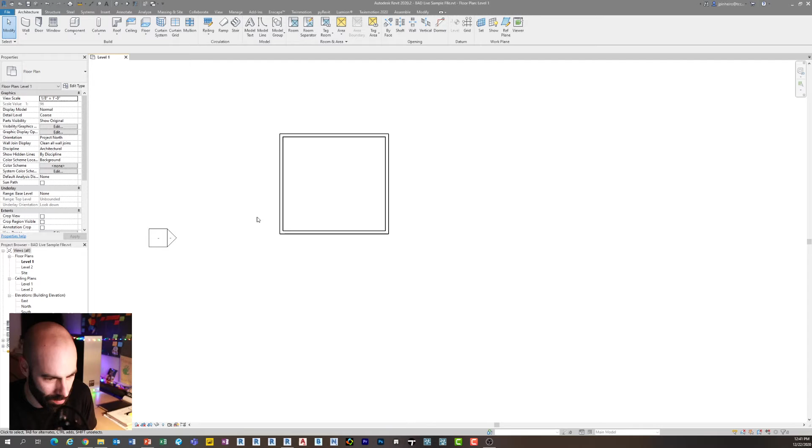Jose asked a question: best way to produce door, windows, and curtain wall sheets. Well, that could be an entire episode, Jose, because they're all kind of 3 different things we're talking about here. I'm not really sure which one I should pick apart. Everyone kind of has their own ways of doing doors, windows, and curtain walls as far as sheets are concerned. If you're talking about schedules, that's one thing. If you're talking about door elevations, that's another thing. I'm not really sure exactly what you're talking about, but that's a great idea, possibly for an entire episode.

I think what you'll find is that I might show a way here, but there's probably about 30 people online right now in this chat that will say they do it this way, this way, this way. So I think maybe we'll shelf that one. I'll use it as a topic for next year, and maybe we'll expand on it, sort of decide one or two of the best ways, best practices, and show those.

I'll tell you that it's not easy, and they're all different. So with doors, you could use legends, you could use detailed drafted views, depending on who. I like the idea of legends. You could use a future/standard phase, which Aaron Maller talks about in his 2 episodes that he came on this year, so that you're actually just using elevations of those objects, those doors and windows.

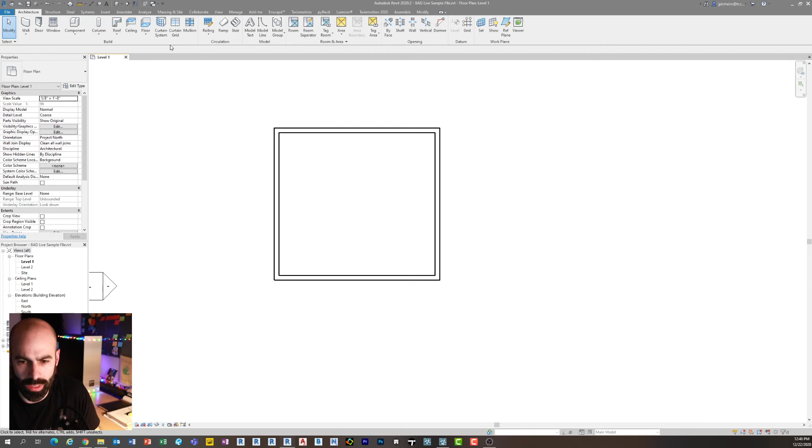Okay, close that. All right, so I think Lumion's finally open. Perfect, so let's flip over here. So if I quickly go in, I'm in Revit and I have these 4 walls, right? If I go in 3D, you can see there's 4 walls.

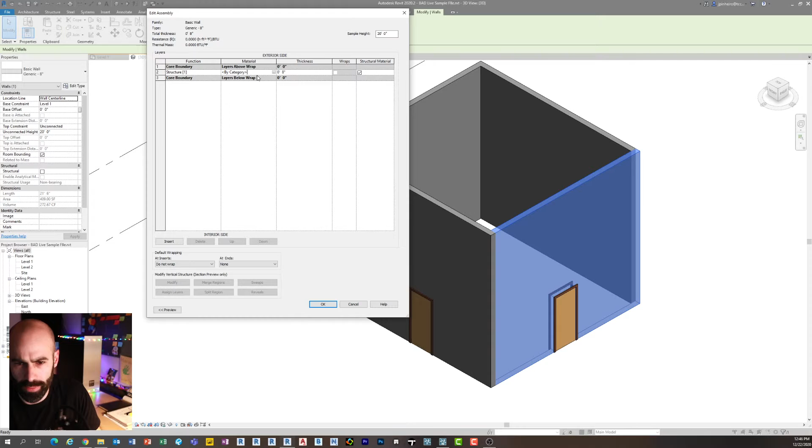Well, if I place a door in them, the door has a different color, etc. But if I go in this wall, if I click this wall here and go to Edit Type, this is a generic 8-inch wall, right? So all these generic walls in here, if I go to Edit, guess what? They don't have a material applied. So they get assigned a material when you export called default. So what you need to do is assign a material to this. So I'm going to quickly assign a material.

Let's just say concrete precast. Notice concrete precast over here, that's the name of my material. It has nothing to do with the appearance. It's all about the graphics here, or not the graphics—it's all about this material container, so to speak.

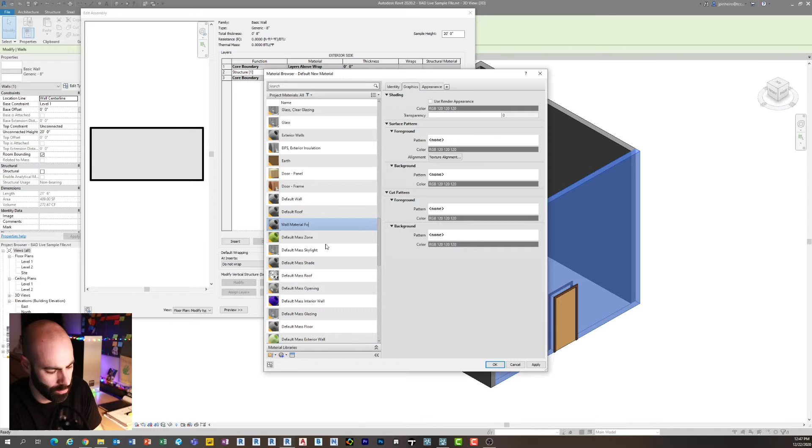If I want to make a new one, I can say create new, rename it wall material for Lumion 1, and assign that. Now when this comes into Lumion, I'll change these three to a different one—I'll change them to generic 6-inch. These walls are going to come in as default. This wall is going to come in as its actual material.

So what I'll do is I'll quickly export to Lumion. Of course, that goes on the other screen—I apologize. I'm going to put that on my desktop. I'm going to jump into Lumion and do a new plane.

You guys are awesome, by the way. So many chats coming in. I'm trying to keep up—I'm going to try my best to keep up, I should say.

So now I'm in Lumion here. Let me zoom out. I'm just going to go to import new model, select that guy, which is called BAO live sample, and click open. I'm just going to toss it in here. There it is. Beautiful. Oh, it's so lovely.

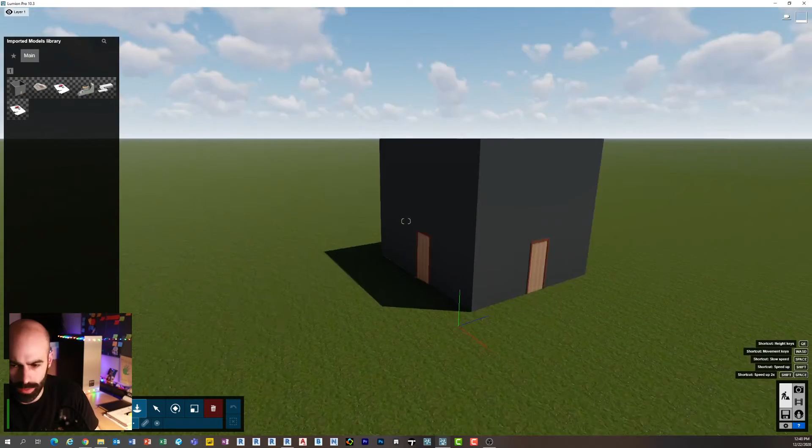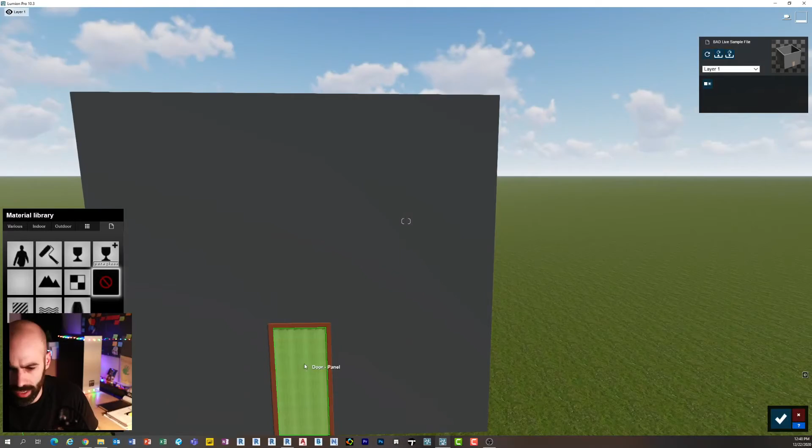Now if I go to materials, you'll notice this one—if I hover over this, it's called wall material for Lumion 1. If I click this, you'll see it selects all of these walls, and they're called default wall. And then if I go down here, I can actually select the panel, because that had its own material. So it has nothing to do with the elements.

If you're using Twinmotion, for example, you can actually export using element—the actual families, the actual family structure, categories, and all that. But the way Lumion by default brings it in is exactly what I just showed you. It's using the material name. So that's the issue you're running into there.

Let's see. Hopefully that was helpful. Anish, thanks for the question, buddy.

How to design a coffered ceiling—when I draw the section using sweep command, and I want to join them in Revit. Coffers are tough. I'm not really sure—it's one of those situations where it depends on what it is that you're trying to make, honestly.

I've seen some successful uses of coffered ceilings by building actual families that fill in the void. So you do a ceiling, and then you build a family that fills in the void, or you build it out using maybe walls on the inside, and then ceiling and ceiling. There's multiple ways to approach it. I think it depends on what your coffered is and what you're trying to do, or what the end goal is.

What you're talking about there is using sweep, so I'm assuming maybe you're sweeping it around the ceiling. That's probably the last thing I would do, mainly because you're doing an in-place component at that point. As much as possible, you want to try to avoid in-place.

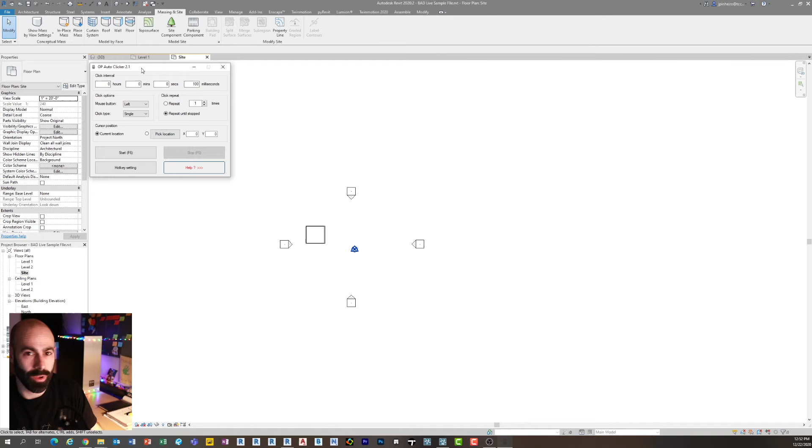The only way to smooth out topography - and I think Yolande is actually using it for exporting and using it in different software - unfortunately, they're going to get faceted. They're not going to get pretty smooth. The only way you're going to get something smooth is if you spend the time adding thousands and millions of points, that's really the honest truth.

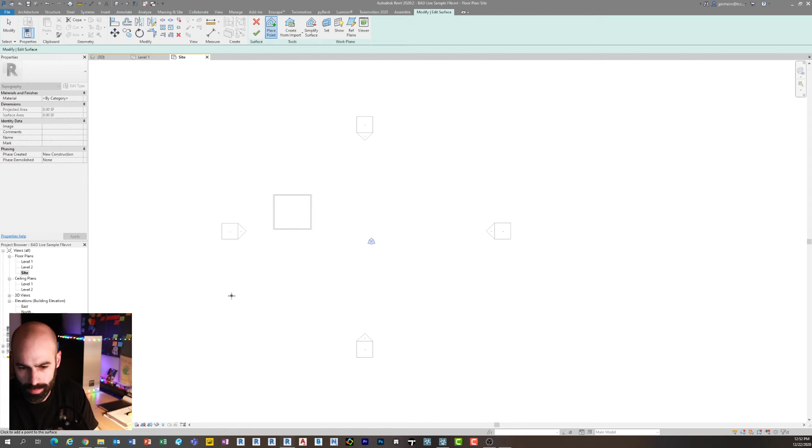So if I create a topo surface right now, you can see I have Auto Clicker up. I'm going to set this to 100 milliseconds and hit F6. So I just hit F6 and it's auto clicking. The tighter that these points are together, the smoother those lines are going to be, right? So you want these points to be really, really tight together.

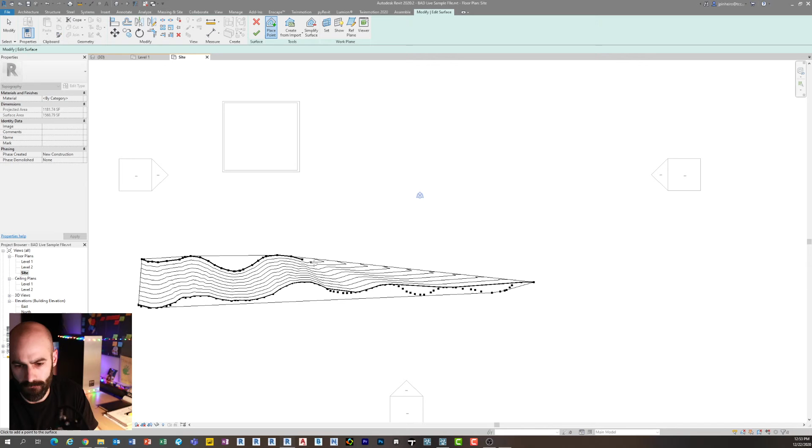The other thing is, if I say that's 0 feet, and I say go to 10 feet and I do this, Revit is figuring out what it wants to be in between all of these, right? That's what each 1 foot contour is. So notice how it's kind of jagged.

Revit's triangulating this. So if you really wanted something smooth, guess what? You are going to have to sit there and tell Revit what each foot, or maybe 2 feet depending on how smooth, wants to be. And that right there will get it, because you're basically not letting Revit decide.

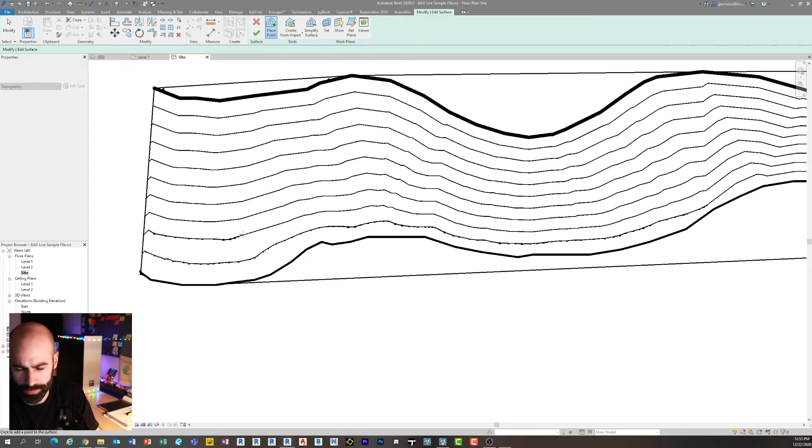So I'm just hitting F6 for my Auto Clicker, and I'm going to go like this. What I'm doing is placing points for every foot contour, essentially. You could try 2, you could try 3, doesn't really matter. But what you'll notice - oops, just went a little nuts there - is Revit now, it's kind of hard to see in here, but Revit's not trying to figure out what the triangulation is between them, okay?

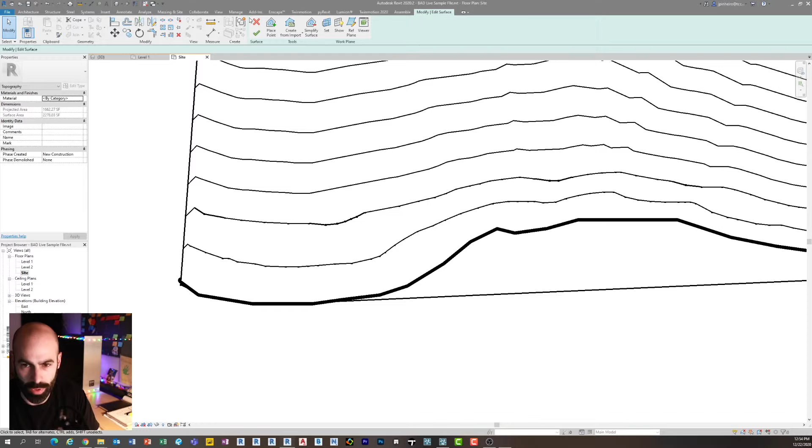So really, what I'm trying to show you there is the only way to get smooth contours is to model each contour as smooth as possible. So hopefully that's helpful, and we can dig into that more on the community, Yolande.

Wow, you guys are chatting up a storm. This is awesome. So many questions. Man, I forgot the first time I did this in episode 20, I did 2 that day, if you guys remember - one at this time and one at night. And I remember it was just nonstop questions the entire time for both episodes. So thank you guys so much. This is so cool. I'm gonna try and get as many as I can here.

Let's see. Is there any way to rename Workset 1 when enabling work sharing? I don't think you can, actually. Maybe someone out there knows, and I'm not even going to bother trying to do that live because I'd have to create worksets and do all that. But I do not think Workset 1 and Shared Levels and Grids, I don't think you can rename them.

Hey, Aaron's here. What's up, Aaron? I just gave Aaron a nice shout out before with his previous/future phases, depending on how you want to look at it. That is an awesome tip for those of you that don't know. Check out the episodes with Aaron Maller - I think it was the template one - but just go to live.bimafterdark.com and check it out.

Yash asked the best way for Dynamo. So I think what you're asking is the best way to learn Dynamo. First, check out all my videos here on the channel and at the blog at therevitkid.com.

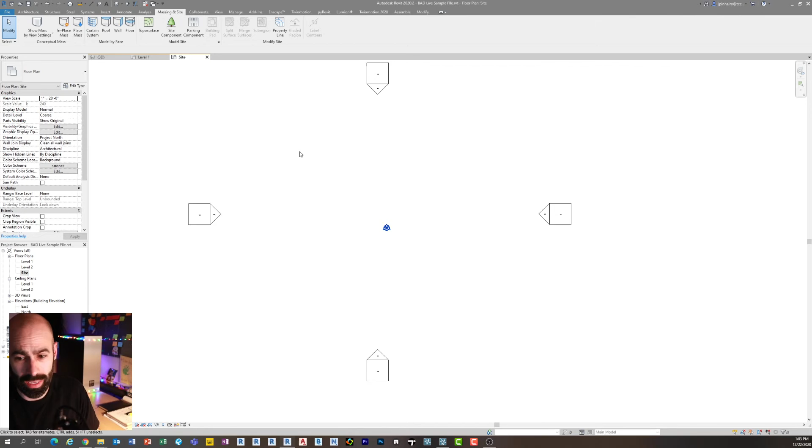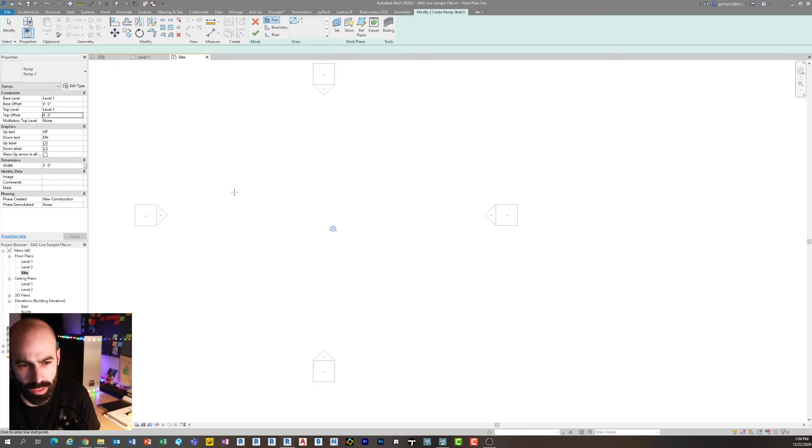All right, so I guess it depends on what your ramp is and the construction of it. So there's a couple things you can mess with. If I go into architecture, for those of you who have never made a ramp, I might as well do this here. Go to architecture, go to ramp, and you can see there's two ramp types in here. I don't know why there's two ramp types in here, but you can set your base level and your top level. So the ramp is going from level 1 to level 2, which is probably a really long ramp at 1 to 12. So I'm actually just going to make it go level 1 to level 1 plus 4 feet. We're just going to make a ramp that goes 4 feet, which is going to let me go 30 feet because that's per code before you have a landing. And then I'll do another 18 feet, which will get me 48 inches, right? 1 to 12, so here's my ramp.

If you wanted to change the default width, I could have. But now if I click finish and go into the 3D, there is that beautiful ramp. Wow, so much fun, so cool. So there's the ramp. So the question is...

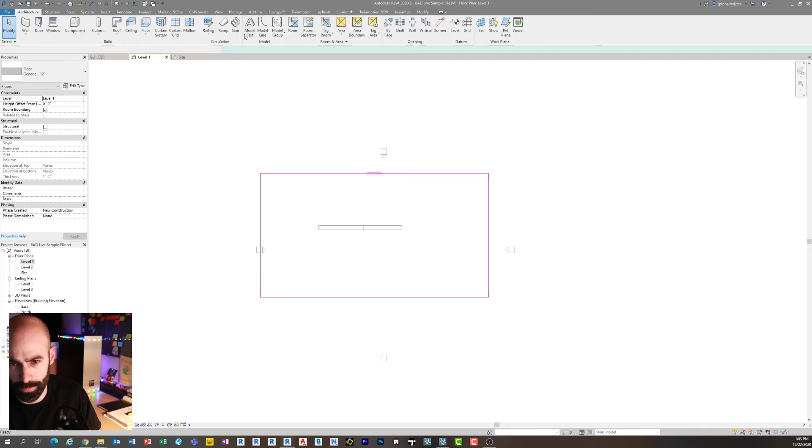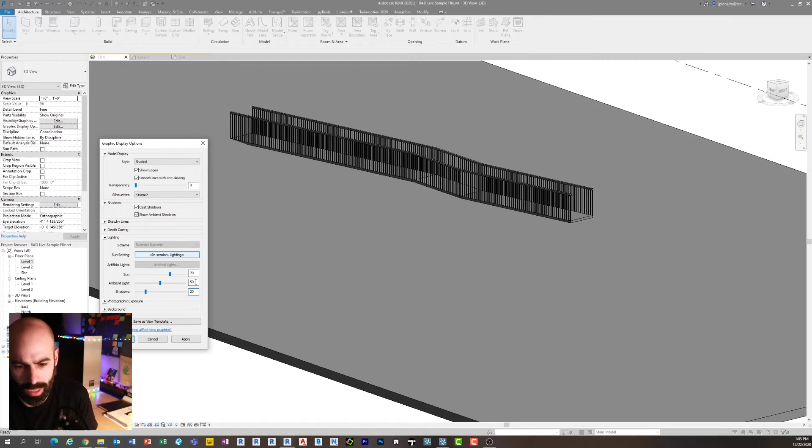Let me toss in a floor so that you guys have a little better context in here, because I know how that is. And I'm also going to add the 70-50-20 rule. Those of you not familiar with the 70-50-20 rule, check out a previous episode, I think it was making BIM sexier or something like that, but I don't remember the episode off the top of my head. Just head on over to live.bimafterdark.com, you'll see. But either way, the 70-50-20 rule is exactly what you're seeing here. You turn on smooth lines with anti-aliasing, turn on shadows and ambient shadows, and then you change the sun, ambient, and shadow light settings to 70, 50, 20. Click apply, and all of a sudden Revit looks absolutely beautiful.

Ta-da, okay. I'm also going to change these hideous railings to pipe railings for now. I guess it's not that much better. Okay, so the question is, how do you fill in under here?

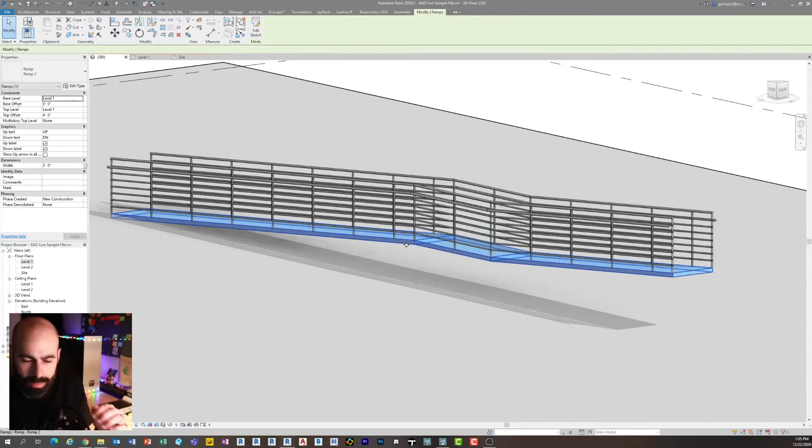It depends. If this is an exterior ramp and it's already built up, maybe you just want to do it directly. The truth is, odds are even if it's an exterior ramp, let me flip these so they're inside so you can see the wall edge. Actually, I'm going to delete the railing so you guys can just see the damn ramp. I'm going to click wall.

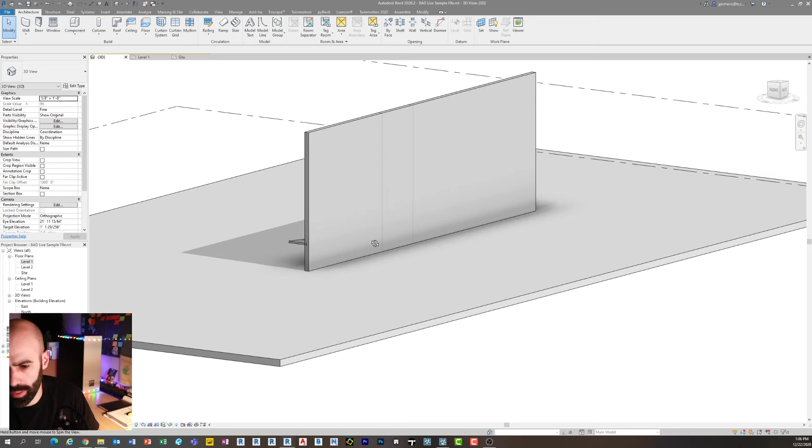Right now I'm just going to pick, for fun, the edge. I'm just drawing a wall like so. There's my wall. So odds are, in most situations, even in the exterior situation, I'm going to delete those. Actually, I'm going to host it to the exterior face. In an exterior situation, it's probably a ramp and a wall, with dirt and fill underneath it. I don't think it'd ever be built out like a Jersey block or a Mafia block wall.

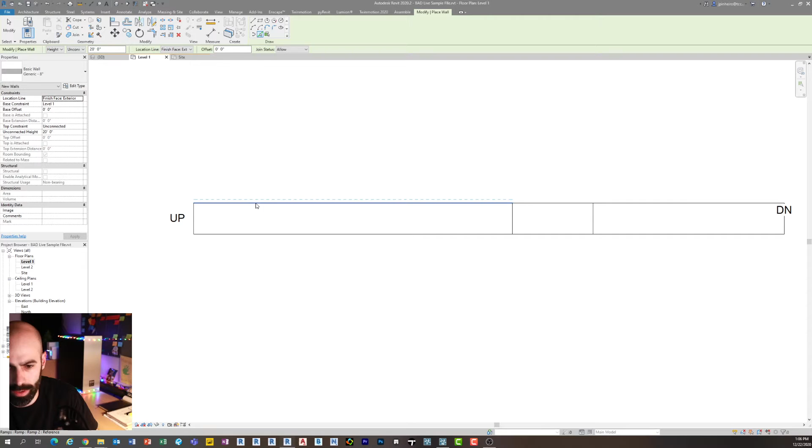So anyways, I'm going to do a pick line again. I'm just going to do finish face exterior and make the walls go in like this. Ta-da, there we go. I got some questions coming in there.

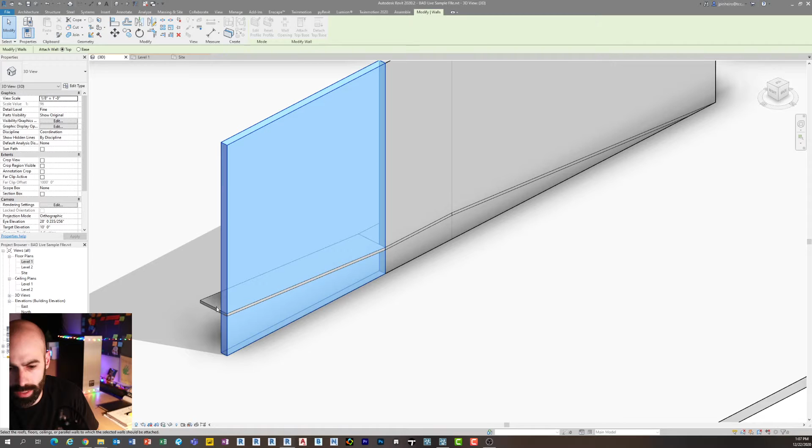So here's the kicker. If I click these guys and try to attach or join, for some reason Revit decided, or Autodesk or somebody making Revit at some point decided, not to let you join or host or attach a wall to a ramp. Why? I don't freaking know. I think it's insane and ridiculous, but it is what it is.

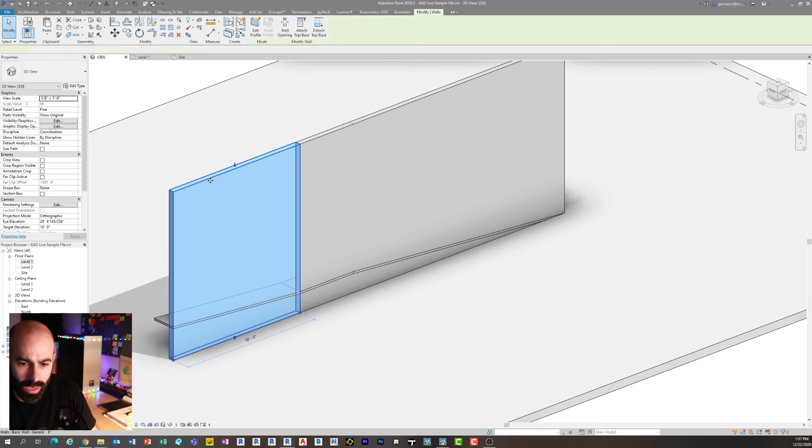So what you have to do is either modify the shape of the wall. If I go to Edit Profile, I can pick this profile, TR on my keyboard for trim, and delete the line up here. Duh. And then this one I can just pull down and do that. And then this one I can say Edit Profile, pick. All right, now you at least have it, and you'd have to do it on the other side or mirror it. So let me do this.

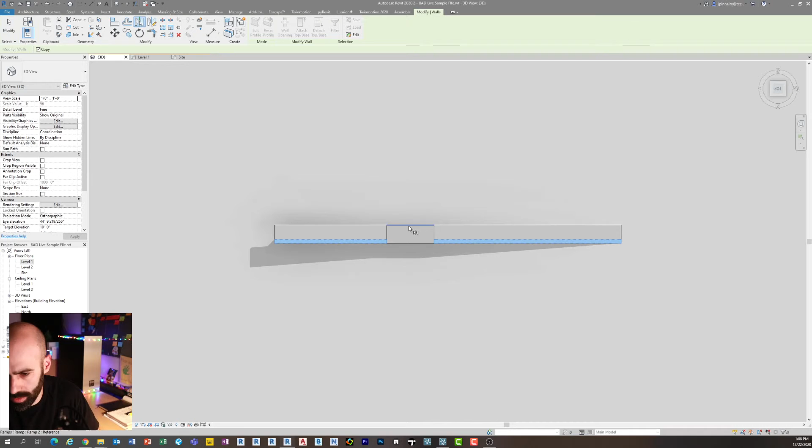If you want to, you can pick and lock them, though I'm not a huge fan of that, since locking things can be disastrous. So now I'm just going to type DM on my keyboard. I'll go to level 1 first, select them, type DM or MM and mirror it. Then go to 3D, and there you go. You have it filled in, right? So there's one way.

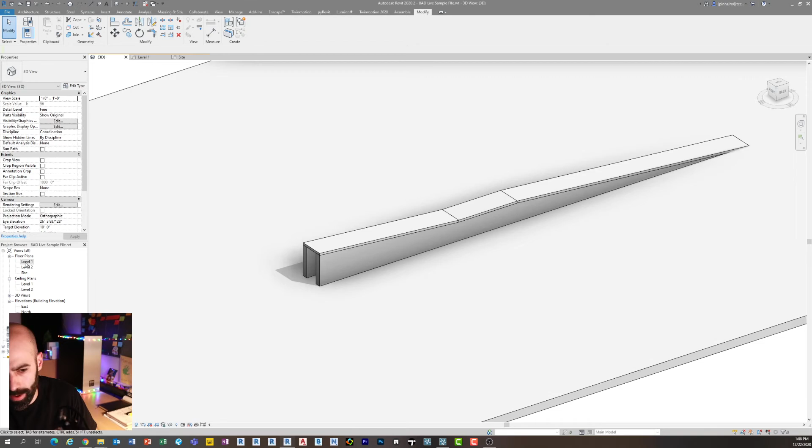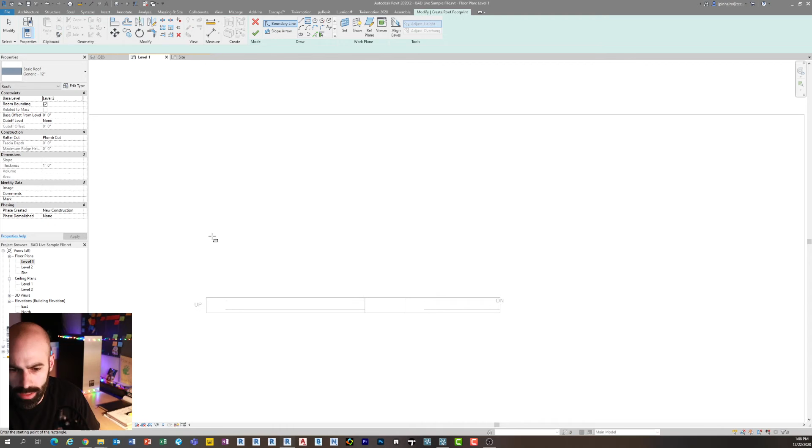If you want, you can put reference planes and attach to the reference planes. The other way is, if you really want, you can use something the wall's attached to, like a roof, I guess. I don't think wall's attached to a floor right now. You can use a roof, but I don't know if railings attach to roofs, since I haven't done it in a while. Let's find out, let's have some fun with this.

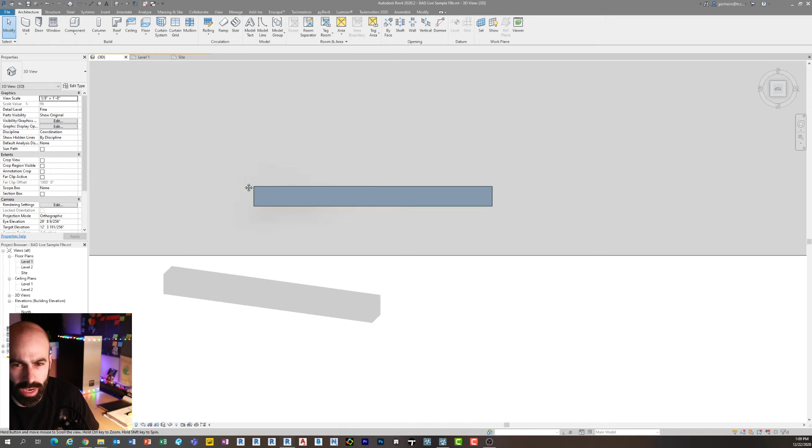I don't recall. Now with the roof tool, you have this cool little funky area here. If I want, I can draw a railing and see if it attaches. I don't remember anymore. There's been so many hosting changes these days. So the railing attaches to it, which is great, and then the wall attaches to it, which is great.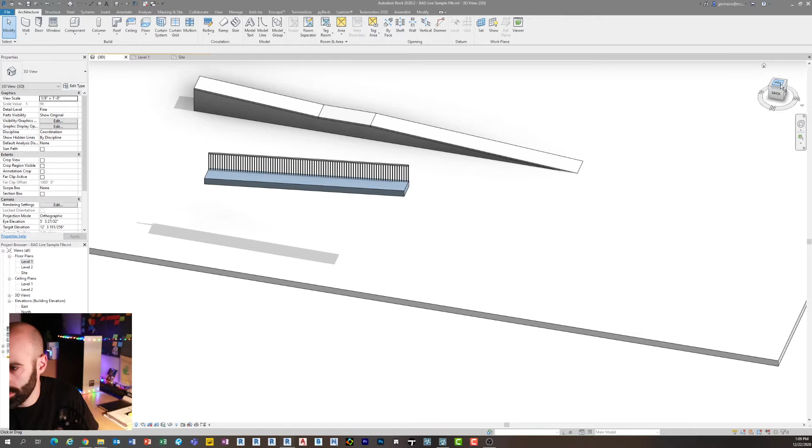So the nice thing about this is you could use a roof, call it a railing, do whatever you want with it. And I'll give Aaron credit again for this, because he's the master at using categories for wrong things, because they're just so much better.

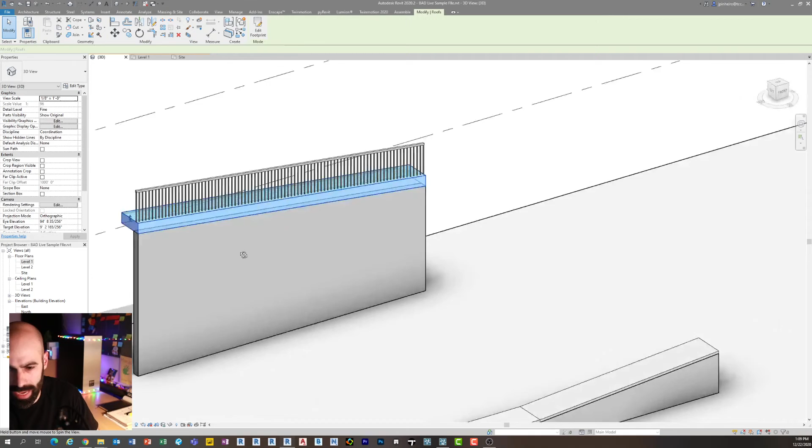And now I can say attach, and attach it to this guy, and look at that. Now not only is it attached, but whatever this roof does, to some extent, not if I drag it like an idiot here - and I'm disjoining it so everything's freaking out, so let's just do this - if I change the slope of it, look at this.

Of course, there's downfalls, there's negatives. You won't have the up arrow and all that good stuff, but you get what I'm saying. So there's different options, but what's right for you may not be right for everyone else. Hopefully that's helpful to give you another option when exploring that.

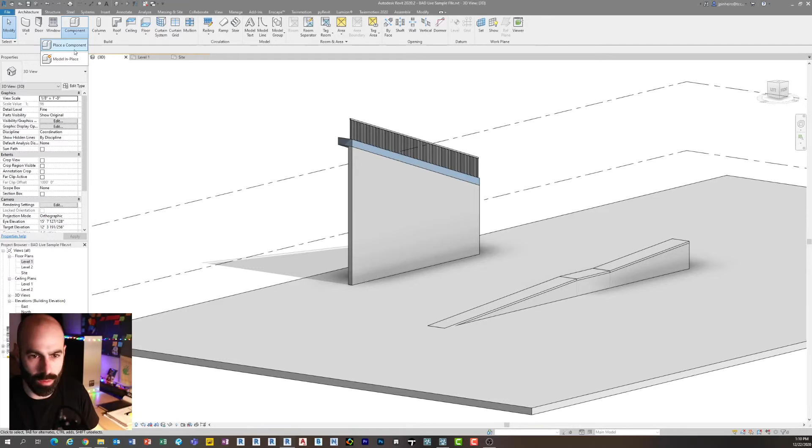But I would, in general guys, and this goes back to the coffered ceiling question, everything - think twice before you do this. Think twice before you click component, model in place. This should be, in my opinion, one of your very last options. Think about all the other ways to do something before you model in place. It's good practice, and it'll make you a better Revit user as well as a better model creator.

So who's Jeffrey Anton Pinheiro? I have no idea, Robin.

Bezad asked, will you explain when multiple users work on a project at the same time, how can we have a backup from the central file? When you're working in a work-shared file, there is a backup that's created, there's a backup folder. I'd suggest checking the Autodesk help, there's a bunch of information on how to recover a backup file through the central file process. Not to mention, you usually have local versions too. Look for where your local versions of those files are copied, because sometimes if you can't restore the central, everyone should have a local version somewhere, and you can use those to restore it. So a little tip there.

What size monitor do you recommend? Hey Karen, we just had a conversation about monitors on the community as well. My absolute favorite monitor is a 27-inch 2K monitor. So the resolution is 2K, which is 1440 by 2560 or whatever it is, and the size is 27 inch. That's what I've got right here working with me, that's what I've got in the office. That's by far the perfect balance between not being too big but not being too small, and the 2K resolution is phenomenal. I'm using a ViewSonic right now which I absolutely love, I've got 4 of them in different locations, these are 27-inch 2K monitors. Huge fan of those. Personally I love having more resolution, but with 4K you end up scaling up just to read things usually, and to me I'd rather have it full scale. Perfect 2K gives you a little bit extra. We're good to go.

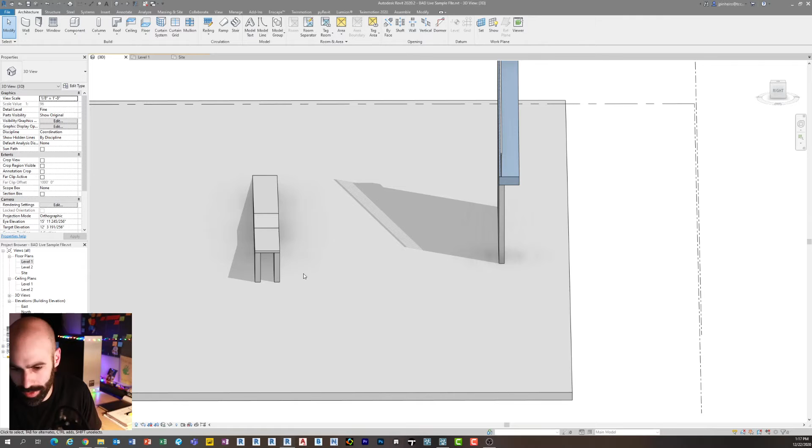John just made another suggestion, which is kind of cool, and maybe I'll show it real quick because I do think that's a cool suggestion. This is what I love about Revit, there's like 1,000 ways to do things. John was suggesting, if you want to use a wall, maybe use this wall or these walls, so I'll delete these ones. You can also make the wall the width of the ramp.

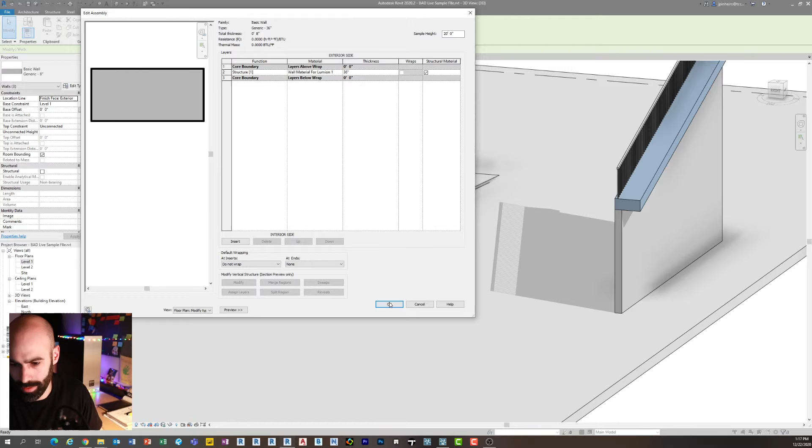So this wall right here is generic 8-inch. If I go to edit, duplicate, I'll say generic 36-inch. So I just duplicated it. I'll change the thickness of it to 36 inches, or 3 feet, or 1 meter I guess. Now you've got yourself a nice thick wall that goes along with it. And if you use the same method over here, then it would also follow, of course this would have to be the thickness of it.

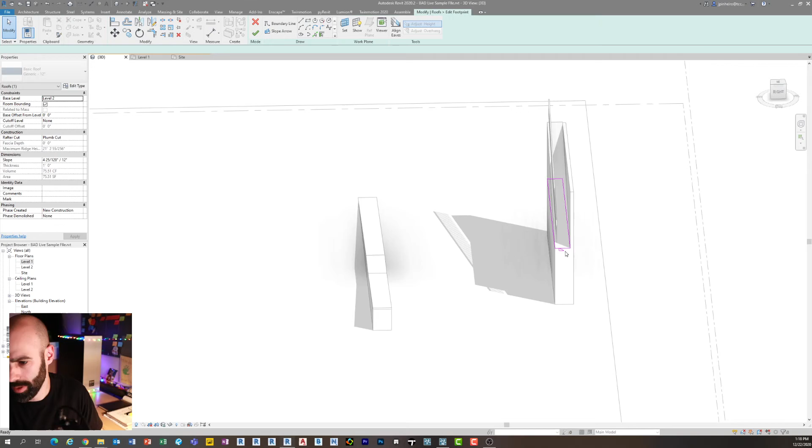But again, I don't know many construction details where that's how a ramp is built. I believe the wall section through this will probably have two walls in my experience, but that's pretty cool. So now you've got this solid mass that's going underneath it. Of course, you have to manage the thickness of the wall versus the ramp if it changes, but you guys get the idea, which is pretty awesome.

Merry Christmas, Tom. What's up? Tom, better late than never. That's all right, man. Let's see.

Can we detail a section and make it separate from the project because sometimes it makes problems? I don't know fully what you're saying there, Taha. Taha asked, can we detail a section and make it separate from the project? I think what you're trying to say is, can we draft a section so it's separate from the model, I think. Correct me if I'm wrong. And I would say no.

I would say as much as possible, use as much of the model as you can, even for your wall sections and details. In my opinion, a typical detail means it's something that can be applied to any project accurately. So if you're cutting a section through your building because that floor to floor height is very specific, guess what, that is a project specific thing. That is not typical. And the reason I'm getting a little fired up about this is I've been on many projects where that was the case.

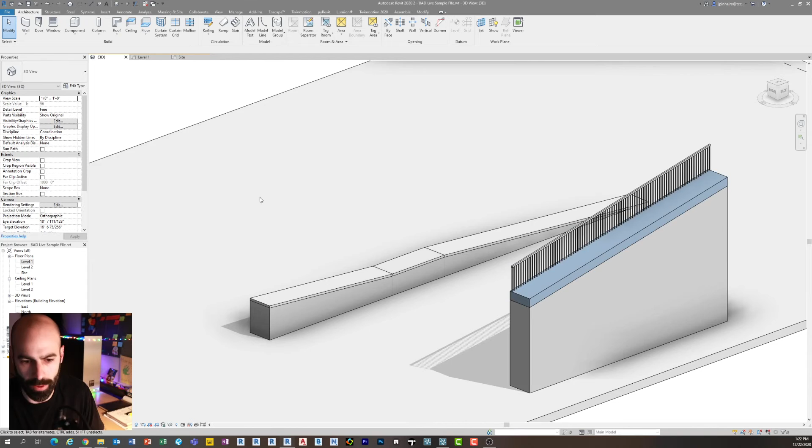JF, I think we got some clarifications on questions here, on the projection lines, something like overhang, curtain pockets, ceilings. So I think what you're saying is managing something like projection lines. I do have a little tip you can find way in the archive somewhere on the blog. When it comes to projection lines, like maybe an overhanging roof, there are a couple tips that are helpful. My suggestion, just like before, is try to use the model lines as much as possible if they exist.

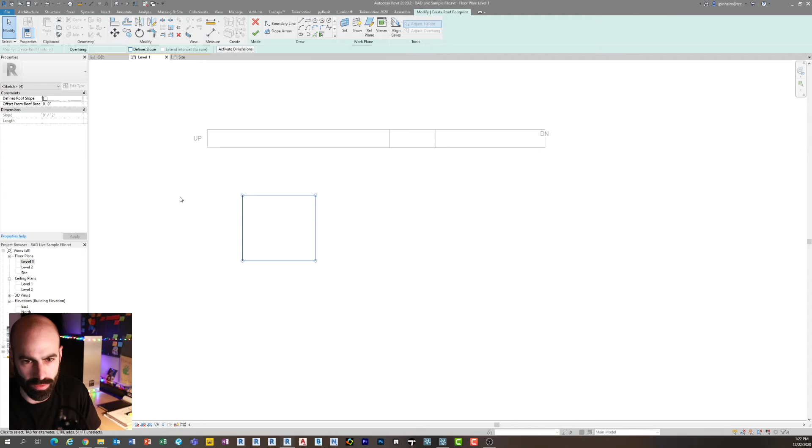So let's do a roof overhang real quick. If I have a roof, and this is just a flat roof for the sake of argument, the roof is at level 2, right? It doesn't show on the first floor. Here it is there, right? There's a whole bunch of stuff on here, so let me try and make it so it's not too confusing for you guys.

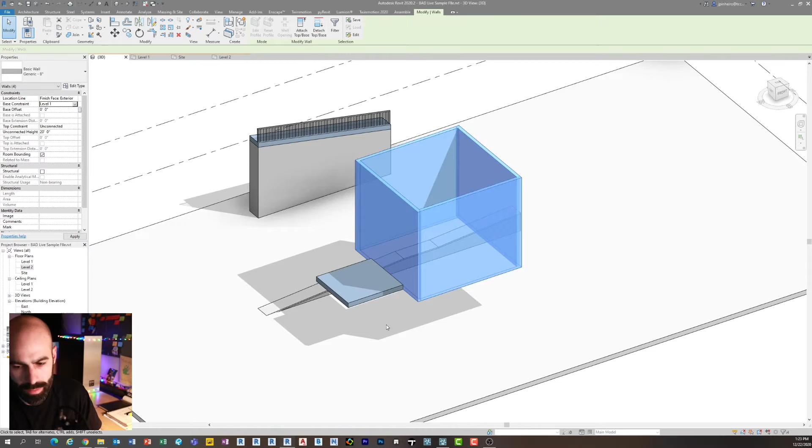I'm gonna quickly draw, and I call this one the overhead line trick. Anyone who's taken any of my courses knows this one a little bit. This is just one of those quirky things with Revit. Let's say this is my beautiful duck-looking building. Look at that bill, quack quack.

If you have this overhang and you want to show it on the first floor, right? So if I go here, I want to see the overhang here as a dotted line showing overhead, right? That's just a typical architectural graphics thing. So there's a couple things that people will do.

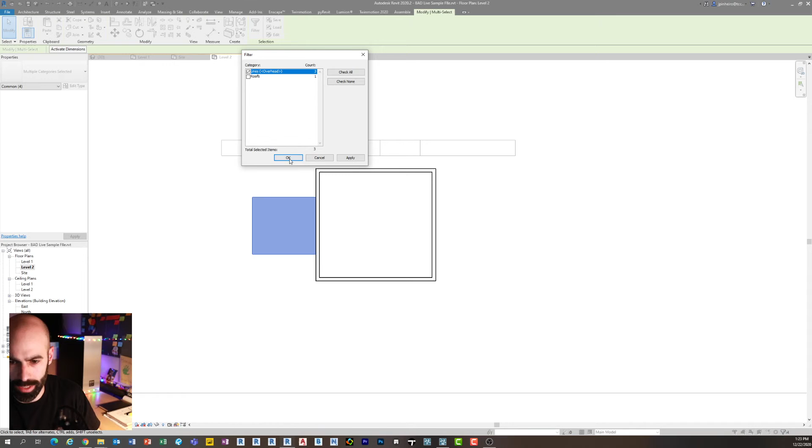The first thing they'll do is they'll go to level 2, go to annotate, detail lines, click overhead. They'll do maybe a pick line, take this guy, filter it out, or use PyRevit to use the selection thing. They'll copy it, go to level 1, and then modify, paste, align to current view. Ta-da, we got it, right?

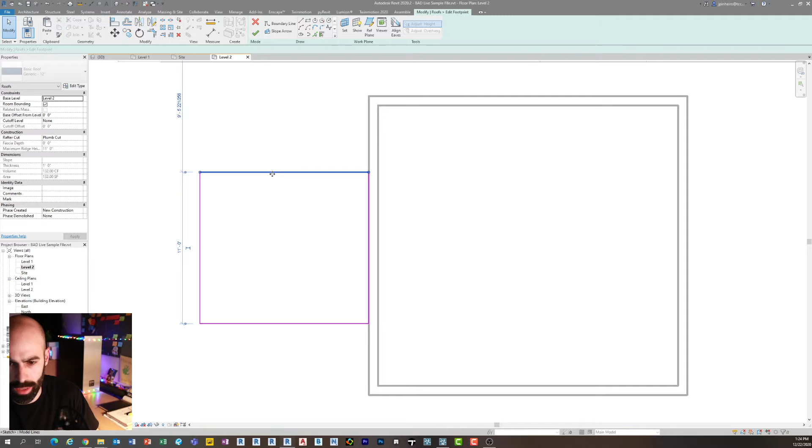Problem is, this is just a line now, right? This thing is not attached to anything. So if I go up to level 2 and I move this roof, guess what? I have to delete that. I have to go here and move or delete and redraw this, right? This has to move up with it.

So by all means, what you want to do is utilize the model whenever possible. There's this really cool trick: if you change your underlay, so if you put level 2 as your underlay and click apply - so I'm in level 1 and I'm underlaying level 2 - there's this neat little thing with Revit where these underlays are objects.

Oops, I'm looking up, look down. Let's see, look up.

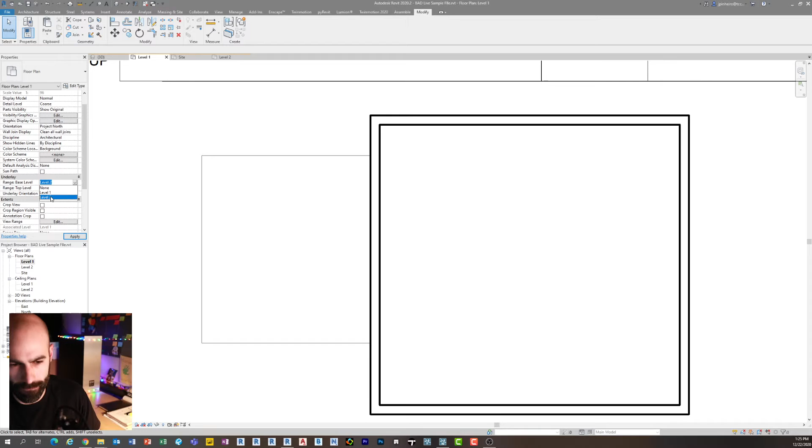Oh, maybe not. Did they make me a liar? Okay, maybe it changed in 2020.

Look down, so what you could do then, let's do it this way. This was going to be my second option - you can look up, right? So now you're looking up at things, and you can make the line weight show as a dotted line, for example. So either you do it in the object styles, or if I go under visibility graphics, lines, there's one called beyond. For those that don't know, that's when you're beyond your view range - we don't need to get into view ranges today. But here, you can change this to hidden.

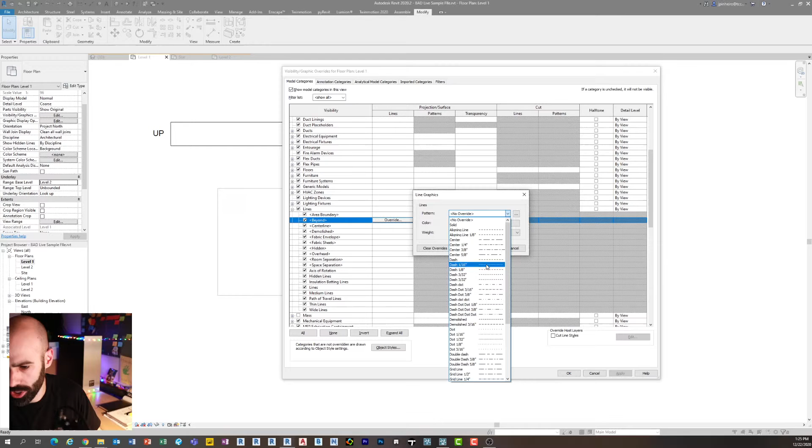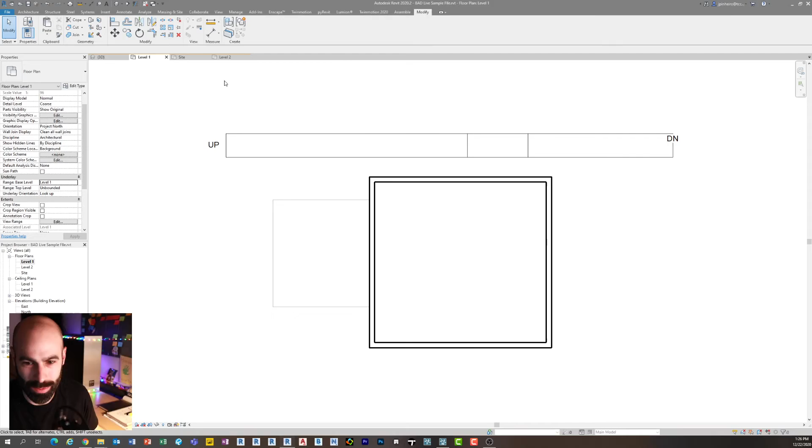And now it's not working. All right, well we're going to skip that for right now. That's what happens when you do a live demo, huh? If anyone knows why that doesn't work anymore, let me know. No, the underlaying isn't doing what I thought it would. All right, so we'll roll back to that question. Sorry about that - who was that? I was asking JF maybe. Sorry, or Siddhartha.

So JF just elaborated on his question, which is, in the door metric family template, should I use the wall core, line, or exterior? Okay, so what JF is asking is when you're building a door...

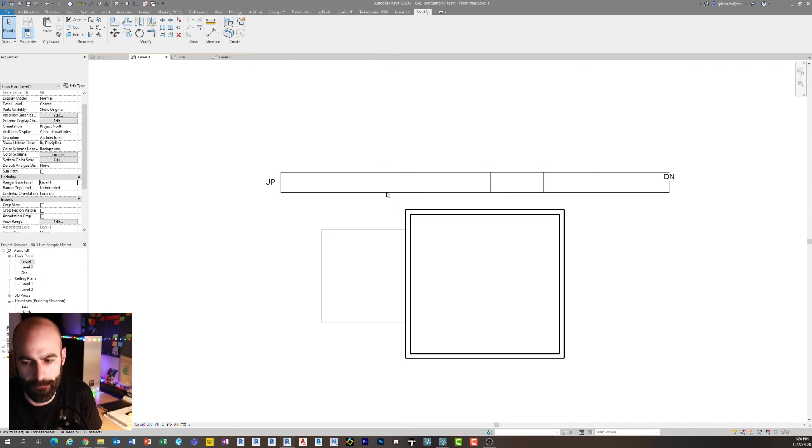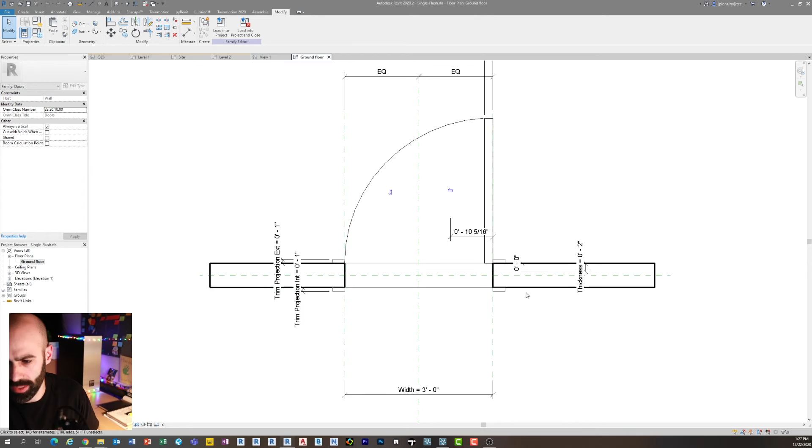So if I'm editing a door, I'll just edit a door for now. In the door family, if I go to edit family, if you go to the floor plan view of this - what you're asking, JF, is I think you're asking what do you want to associate this door from. Do you want to use the face of the wall? Do you want to use the center line? And do you want to use the back face of the wall? It depends on your family and how you want to adjust it. It doesn't really make a difference.

It's all preference. You're probably safest using the center because, you know, depending on where the wall offsets from. But then again, if you have a brick door that has to be inset or offset based on a specific location, then you may want to do it from the face. The good thing is, unless you start adding sweeps and doing weird stuff with your wall, the wall type doesn't really matter. You could put as many layers as you want in this, and it's always going to use the absolute outside face of the layer.

So I don't know if that fully answered your question, but hopefully that was a little helpful there. Man, there's so many questions. Man, we're almost running out of time, and you guys are still drilling questions. This is so wild. I'm definitely gonna have to do more AMAs. I'm always a little nervous to do these because obviously this isn't the easiest thing in the world to do, but I do think that you guys enjoy them because I always get a ton of questions from them.

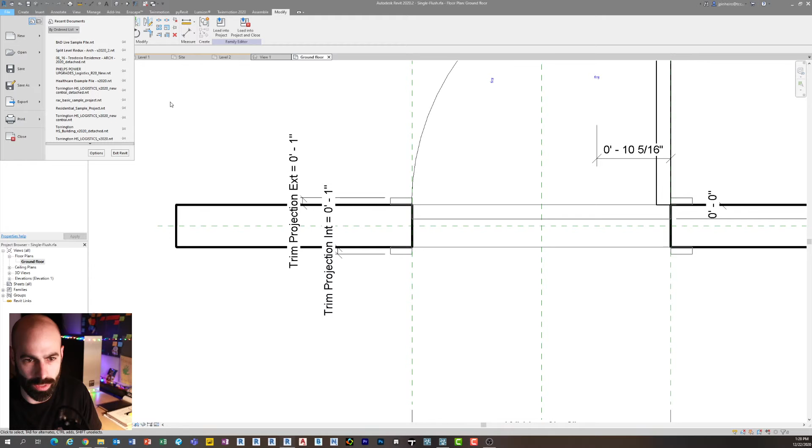So let me just - Clive was asking, are there any suggestions on isolating individual 3D objects for use in detailed drawing? Yeah, so this kind of goes without getting again too much on the soapbox - I am a massive believer in using 3D views as much as possible. So I'm gonna open a file real quick, and while it's opening, I'll dig on here.

Robin just said, I've never made two of the same details ever in my 20+ years. Yes, thank you. It is one of those things where we used to argue, myself and someone else at my previous employer, about who were the BIM guys. We used to argue all day long about how the typical detail and cabinet details and cant strips and roof drawings - like these haven't been typical for like 15 years. We literally build them different in every single job. Why on earth are we keeping these in the set? It's just insane. So I always question whenever someone asks me about Revit and typical details - I always question immediately, what is your typical detail, and is it really typical?

Wow, I'm getting lost here. Hold on, let me see. What do we got?

Musa asked, how do you convert massing into material like concrete? Let me go back into this. I'm not sure if you're talking about changing it into thick concrete, or if you're talking about changing it into a concrete building.

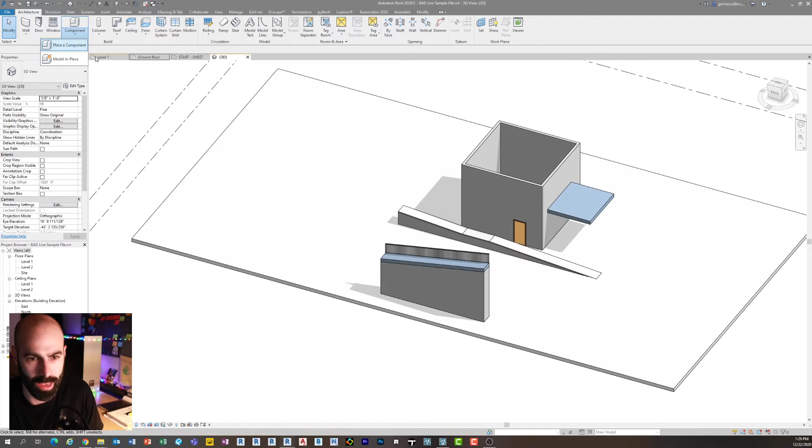But just real quickly, what I'll do is a mass in place, notice I'm doing a mass in place, not a component in place. So if I do test concrete, let's make a fun mass here. I'll take these splines, just doing a spline with model lines.

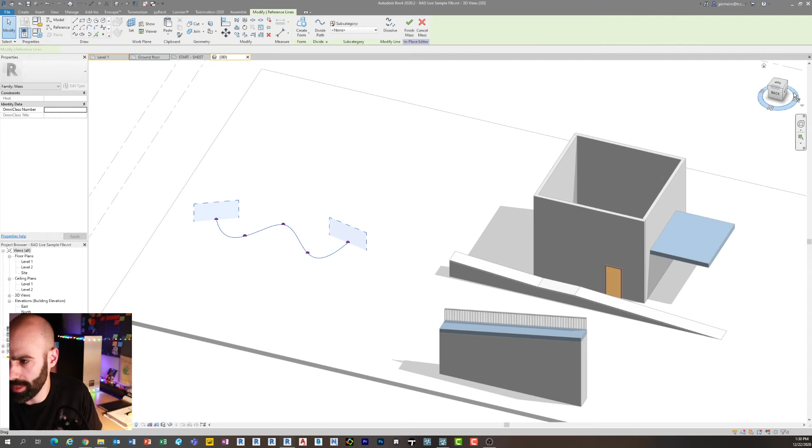I'm going to copy them up a couple times. Oops, and I copy it one more time. So there we go. Now we have these splines here, and I'll take these and adjust them a little bit to have some fun.

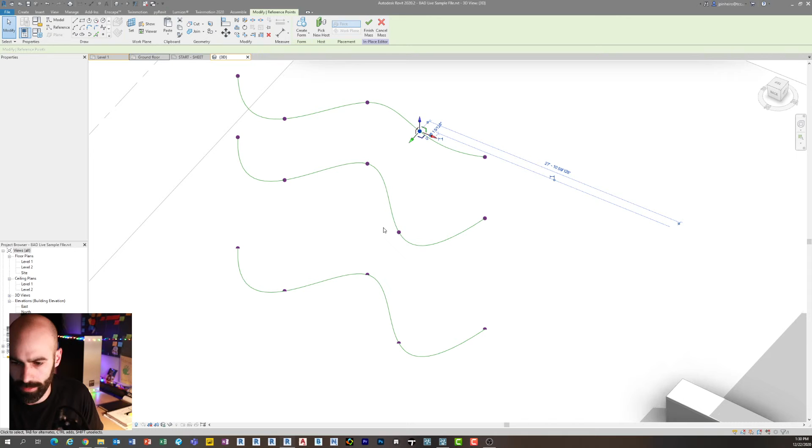So now if I just take these and join them, create form, I've got this cool form. I have an episode with Tim Waldock from this year where he went through organic massing, which is really cool, and he talked about some of the pros and cons of this.

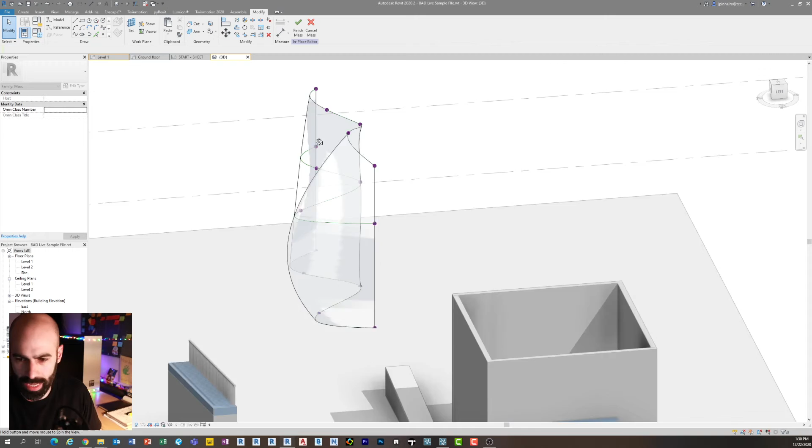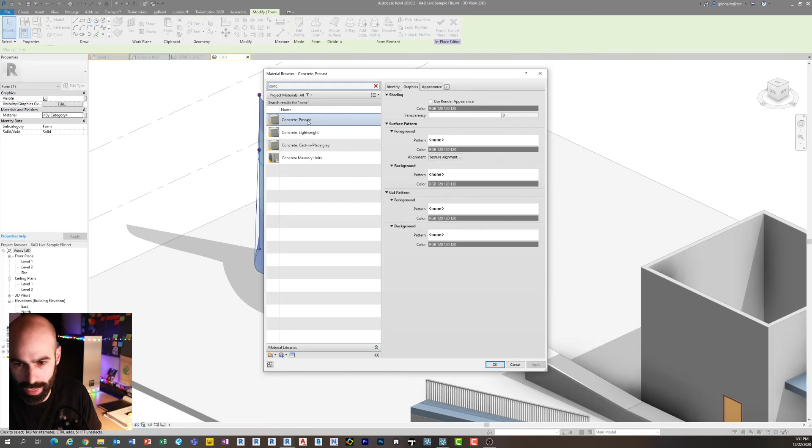The actual mass itself, if you tab and select it, by default it's set to by category, which means if you exported this to Lumion or anything else, the default name would be form for the material. But you can give it a material - I can say I want this to be concrete, even though it has no thickness, it's just a plane. You can do concrete precast, and now you can see we have concrete, right?

Or if I want it to be a concrete wall, I can just click wall, and do a wall by face. I'll use my foundation somewhere in here, retaining, sure. And now, check that thing out. If I hide my mass - because if you see any other episodes about massing, you never want to delete it - if I hide it using EH, now I've got this wall that's made out of concrete. That's pretty funky wild, right?

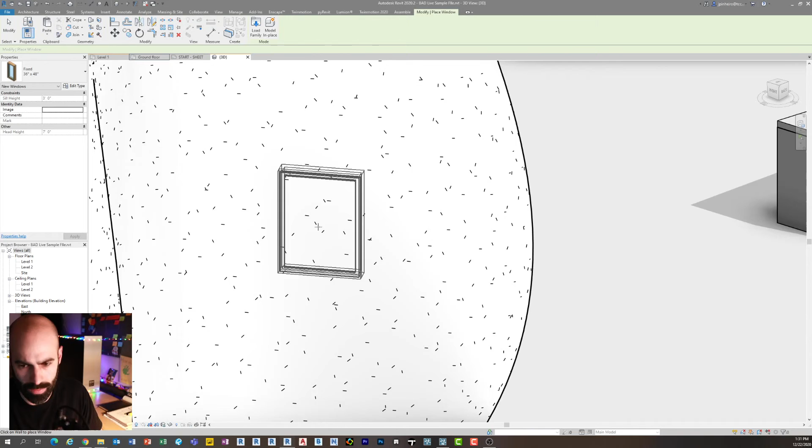I can even put windows in it, although Revit didn't seem happy about that for some reason. There we go, I can even put windows and doors in it, and it's going to do its best to Frank Gehry these things in there. So pretty neat. I don't know if that answers your question, but anytime someone asks a question like that, it's an opportunity to make a really cool, funky form.

All right. Oh, my pick underlay was turned off. Well, there we go. Thanks, Rick.

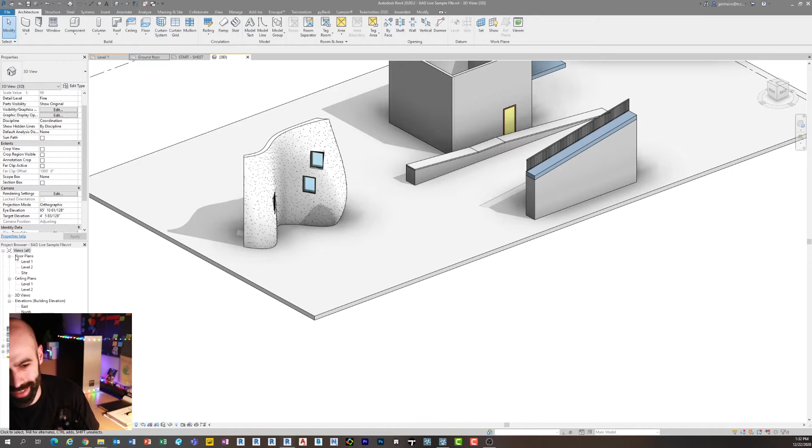My underlay elements are locked, my monitor is - hold on, you guys are finally getting back to it. So all right, here we go. Let me roll back to that line work tool real quick, because thank you for that, dudes and dudettes who helped me out there. So this still works, which is phenomenal.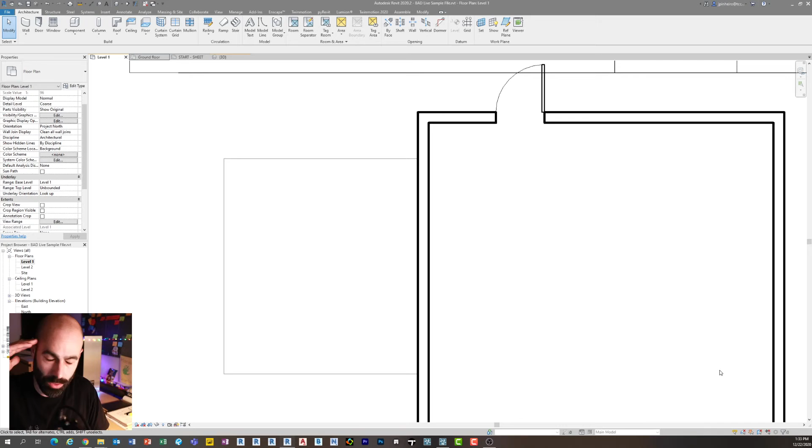The reason I couldn't do it - what I'm doing is pressing line work, and then you notice I see the above. I couldn't do it because there's a little checkbox down on the bottom here, and for those of you who haven't been able to check pinned objects or links, this is a great lesson learned. It's so easy to forget about these icons in the bottom right, especially when your monitor's all the way up there.

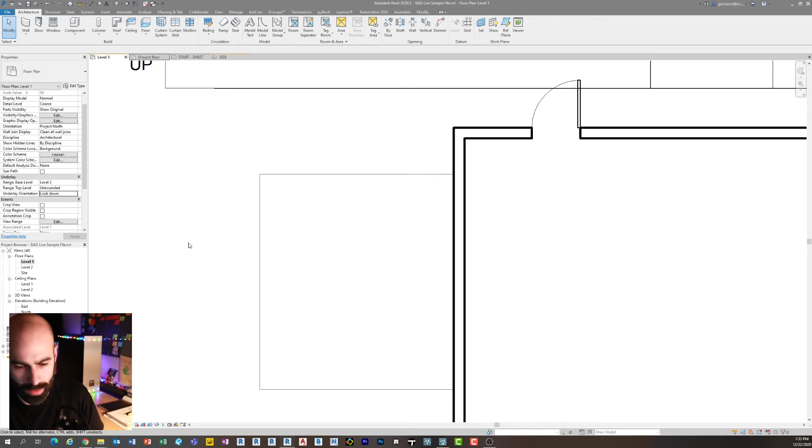But right now I have underlay right here, you can see it says select underlay elements. If I uncheck that right now, if I go to level 2, and I think if I look down - no, it's still not letting me do it. Oh wait, there was - yeah, now it's just freaking out on me, I don't know what's happening. So now I can select it, and I can override it and stuff like that.

I don't know why Linework isn't working, I'm not really sure what's happening here. Well, look up, let's try looking up. I know it works, but whatever - this is what happens when you do it live. Thank you, guys, okay.

You can change the cut plane to upper level and then do it. That's true, yeah, you can jump up and do it down.

How do you make 3D fixing details like Ikea? Okay, Ahmed, I got it man, you just asked the question about four times, dude. I got it. So real quickly, I will talk about 3D details.

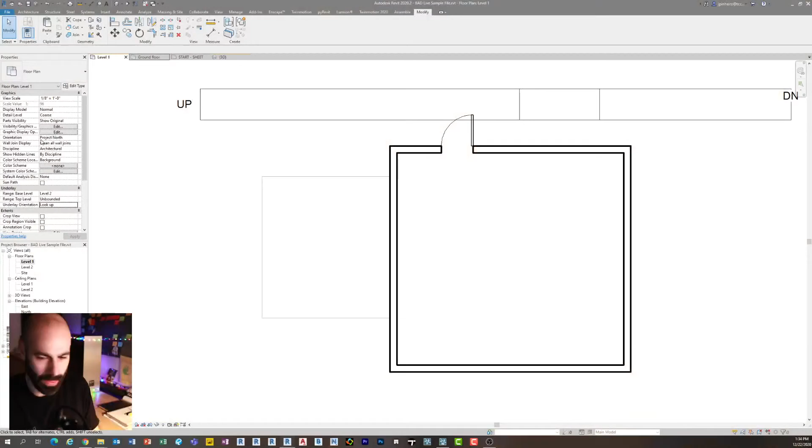I should have got rid of that before. All right, so we'll end up, this is a great place to end. I'm going to end with talking about 3D details and using them in drawings. I'm just modifying the address on this sheet so you guys don't see it. Test. Hopefully it doesn't pop up on any other ones. Awesome, okay.

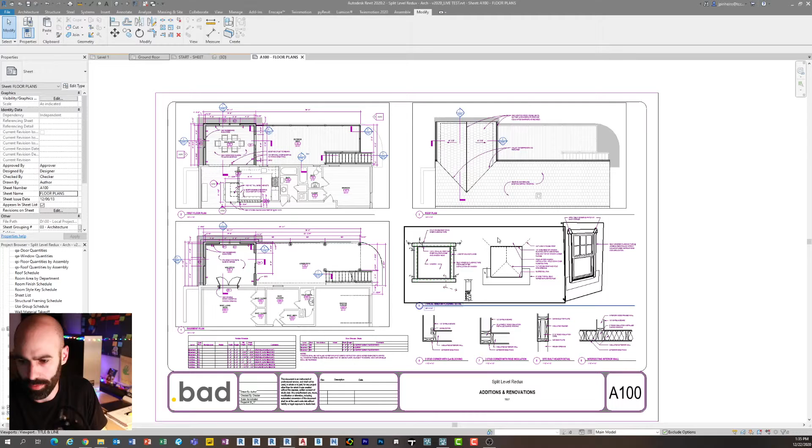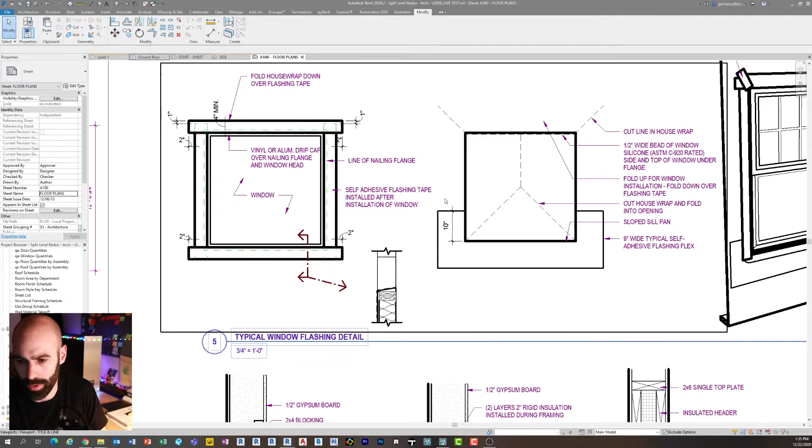As I mentioned, I'm a huge fan of 3D details. These ones down here are typical - actually drafted views carried over many years from CAD to here. Because this detail, the way you wrap flashing and house wrap, is typical, right? And foundations too, or insulation at the blocking. These are kind of typical details, so I have these on all of them.

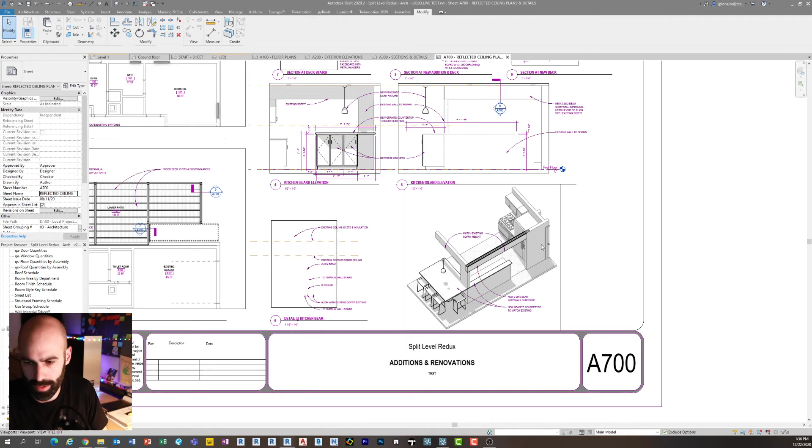But if I go to my sections and details, there's a full building section, which is pretty cool - most of this is modeled, I talked about that in previous episodes. Then, last but not least, this is kind of what I think you're talking about, Ahmed - views like this. This is simple, just a small alteration to the kitchen, and there's elevations, as you can see here. But why can't we do this on our sets? There's no reason why we can't.

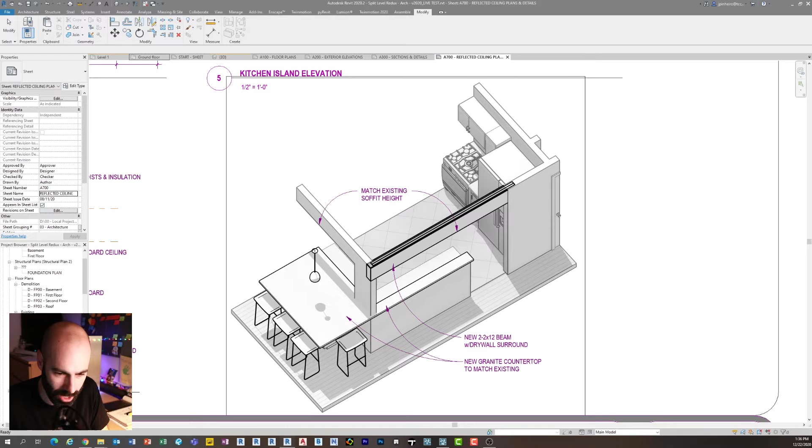Creating this is super simple. Revit gives you a ton of tools to do it, the first being a section box. So if I wanted to... my computer's just telling me it's going to restart if I don't click delay. Click delay. Okay, so here's the area here.

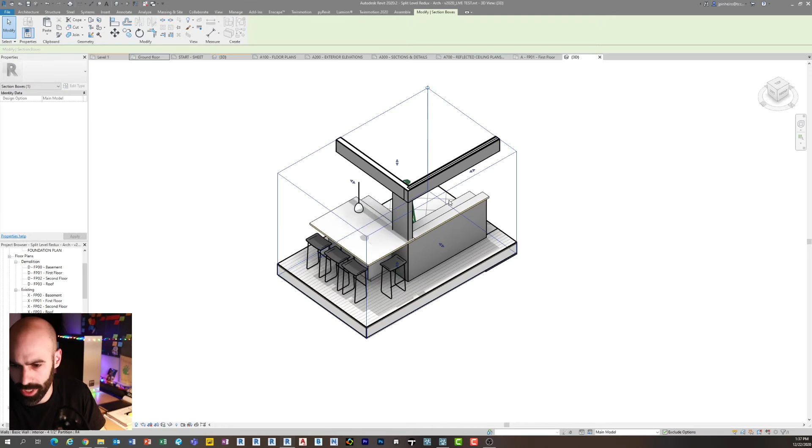Revit makes it so stupid simple. I can just select all of this stuff and hit right here where it says create section box. I can do this from scratch using a 3D view, but if I hit create section box, now it made a section box around my object. I can clean this thing up, expand it a little bit, push and pull it however I want. Then I can just make a new 3D view out of it.

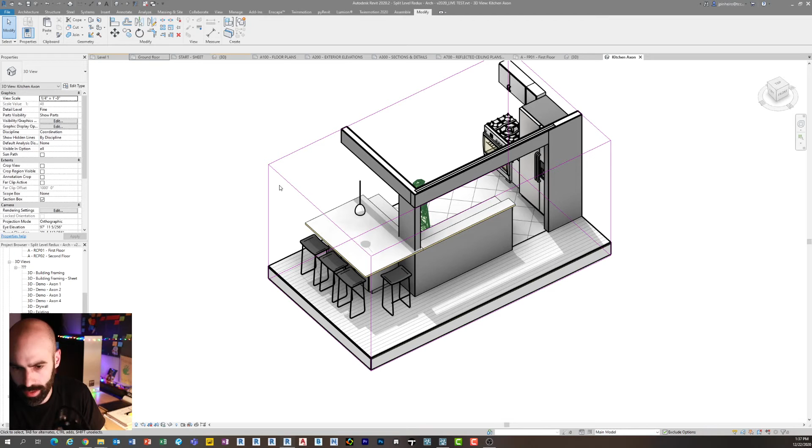I can say duplicate 3D view, and call this one, rename kitchen axon, whatever you want to call it, organize it the way you want. Then you can actually just save the orientation. I'm going to hide using EH on my keyboard, or you can just filter - you get the idea - I'm going to hide my section box. And then from here, I can do annotations because it's locked. And then you throw this thing on a sheet and you have yourself a nice 3D axon. Tell me why on earth these can't be on drawings.

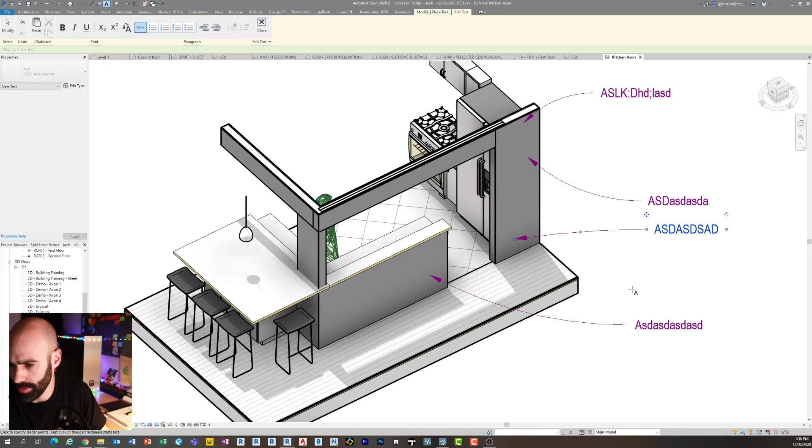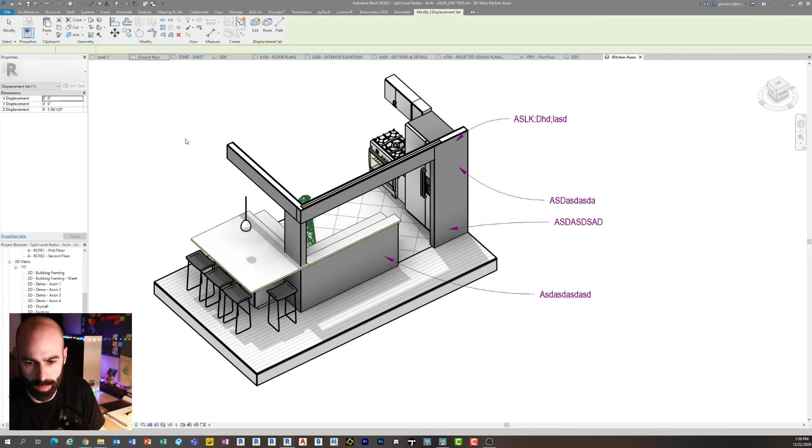My goodness. Ruben just said he thinks Ahmed is talking about displacement sets. Check out my channel - I've got a huge video on how to create exploded axons if you look it up or search for it. And you could do the same thing here. If you really wanted to do an exploded axon, you would just take this, hit displacement set, and move this thing up. So look up displacement sets. If not, search my blog or this channel for what I call exploded axonometrics. So check those out.